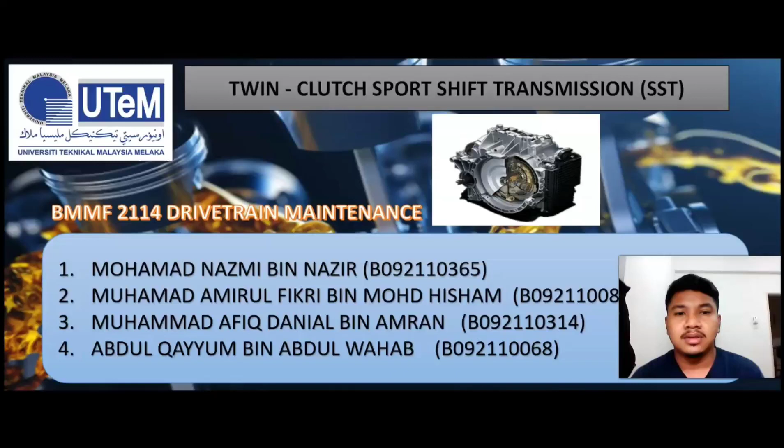I want to present about twin clutch sport shift transmission, SST. First one, introduction. Twin clutch SST, sport or Sportronic shift transmission, is the brand name of a 6-speed dual clutch automatic transmission with 2 clutches and a manual control mode, developed for Mitsubishi Motors. The system was first incorporated in the 2008 Lancer Evolution X and some models from the French PSA group.

It was designed to be a more performance-oriented system than that developed by rival manufacturers, with shorter gear ratios optimized for acceleration, which positively impacts vehicle dynamics and is important for high-performance cars. The twin-clutch SST performs shifts faster than a driver could in a pure manual transmission. It is also far faster than a torque converter automatic transmission or single-clutch automated manual transmission, both of which are found in some luxury and exotic sports cars.

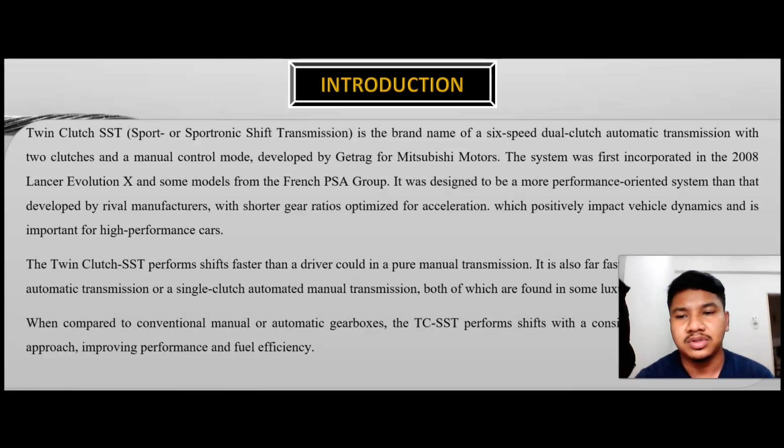When compared to a conventional manual or automatic gearbox, the TC-SST performs shifts with a consistency that no driver can approach, improving performance and fuel efficiency. Operation. The operation of TC-SST is smoother than that of a conventional automatic transmission because it uses clutches instead of a torque converter to transmit power. The key to the system operation is in the electronic and hydraulic controls.

TC-SST can select 2 gears at the same time by putting odd, first, third, fifth, and even, second, fourth, and sixth gears on separate input shafts, each connected to an individual clutch. While one gear is engaged by one of the 2 electro-hydraulically operated wet multi-plate clutches, the other is pre-selected, waiting to be engaged by the second wet multi-plate clutch. The TC-SST in principle behaves like 2 3-speed manual transmissions operating on the same output shaft.

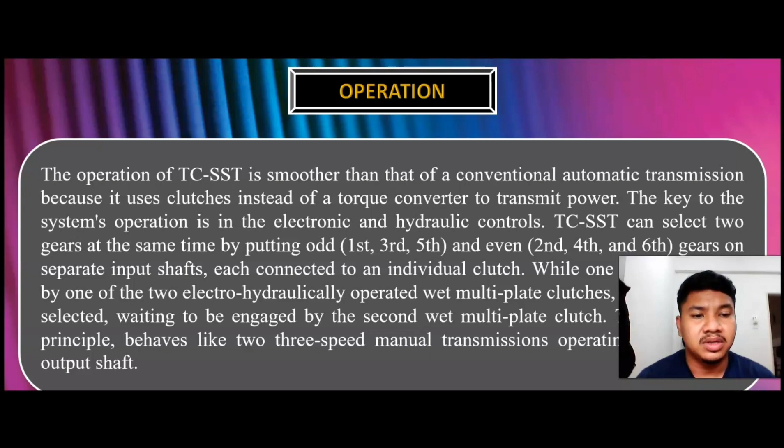I want to tell about how TC-SST works. Normal mode scheduling uses relatively low speed shift locations to deliver unobtrusive shifting for the best comfort and optimum fuel economy in everyday driving scenarios.

Sport mode scheduling, which is useful when driving in the mountains or when engine braking is required, utilizes higher shift points and faster shifting to give instant throttle response, instilling in the driver a closer man-machine relationship. Super sport mode scheduling, when compared to sport mode, keeps the engine turning at higher RPM while allowing for lightning fast shifting.

Shifting options. The TC-SST in the Lancer Ralliart has 2 drive modes, normal and sport, and within each, the driver can select automatic or manual shifting. The TC-SST operates in the same way whether the driver shifts manually or selects automatic mode. The console mount shifter, like a conventional automatic transmission, has 4 positions: P, R, N, and D.

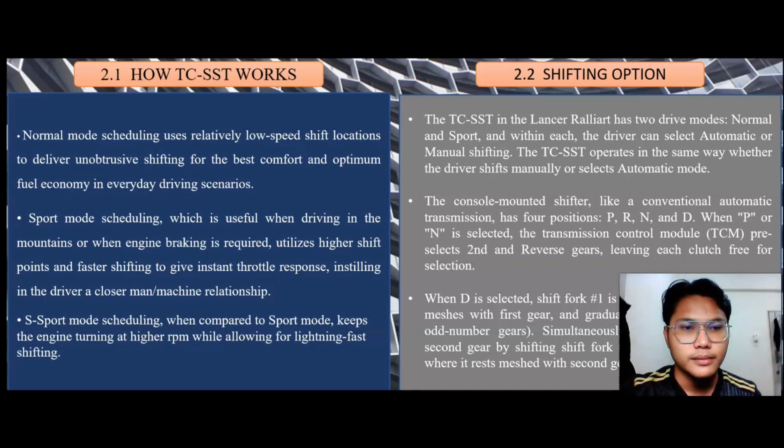Next, manual and automatic. With automatic or manual operation options, the TC-SST transmission makes a range for maximum performance and efficiency. Shifting is automatic if the driver leaves the shifter in D, and the driver controls shifting performance through two selectable drive modes, normal and sport. Normal is the default mode. In automatic mode, each drive mode controls shifting according to its own shift map and in response to numerous inputs from the engine, steering, wheel speed sensors, and the AWC computer.

On the console, the driving mode switch is positioned behind the shifter. Pushing it forward, or plus, switches to sport mode. At any time or vehicle speed, the driver can select between normal and sport mode. The driver can switch to manual mode at any time while in any drive mode using the paddle shifters.

Next is the manual operation. The driver can select manual operation in either of the TC-SST drive modes, normal or sport, and the drive mode selected affects shifting speed. The driver can select manual mode in two ways. The first one is with the console shifter, by pulling it back over D and then left into the manual slot, or the second one using the steering wheel. Pulling the shifter back, plus, selects an upshift, while moving it forward, negative, selects a downshift.

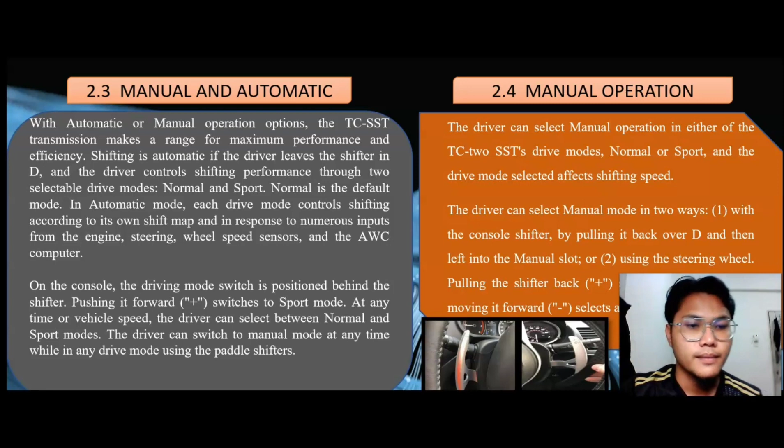So today I will explain about this transmission. When driving in D, the TC-SST gives a relatively close response. Just like the Lancer Evolution MR model, the TCM continuously accepts input from engine operating parameters, including engine speed and torque, as well as information from the AWC computer while in D, in either of the two driving modes. As a result, the driver may assume the TC-SST will select the appropriate gear for any particular cornering condition.

Then the second is the TC-SST, like a conventional automatic transmission, has a kick down function that selects a lower gear fast when the accelerator pedal is immediately pressed to the floor. Lower ratios will be held by shifting intelligently while the car is ascending and descending an incline, for example, for power or for engine braking. Pulling one of the paddle shifters will immediately switch the transmission into manual mode, allowing the driver even more control.

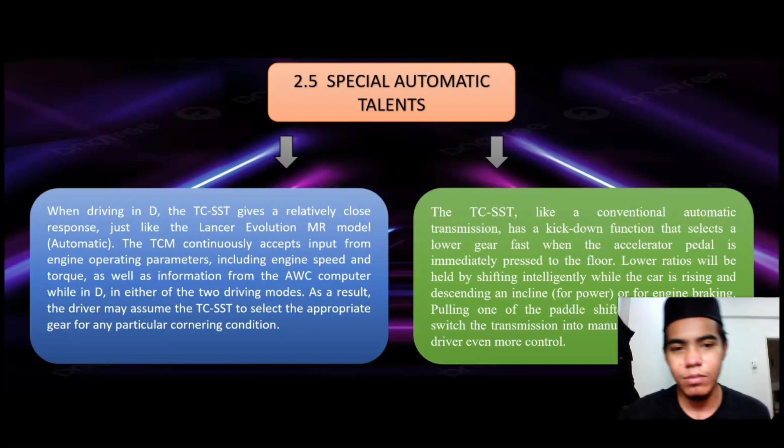The construction in SST is they have a transfer gear and then transmission control unit, sensor, transmission valve body, solenoid, oil cooler, and multi-plate clutch.

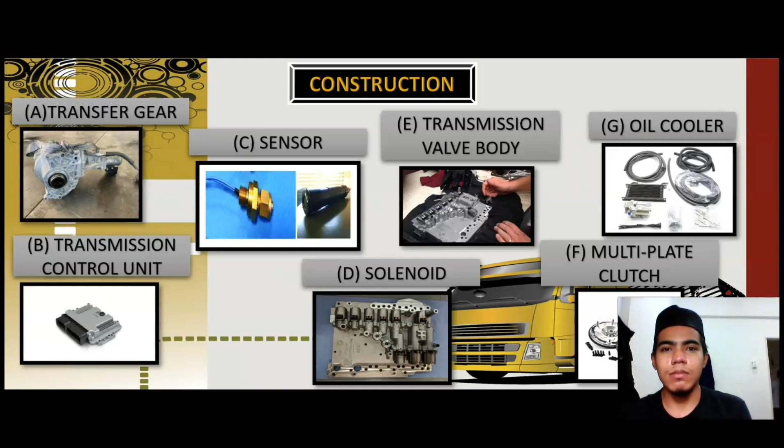The advantages and disadvantages. Firstly, the advantages: lighter and simpler than a traditional automatic. Sequential gear shifts are very fast and more efficient than a traditional automatic with a torque converter. The disadvantage is it is expensive, heavy, and more complex than a single clutch manual. Only sequential gear shifts are normally possible, and if they are not, then shifts in even steps, 2 gears up or down, are no faster than a single clutch transmission. Shifts are more abrupt than with a traditional automatic since there is no torque converter to smooth them out.

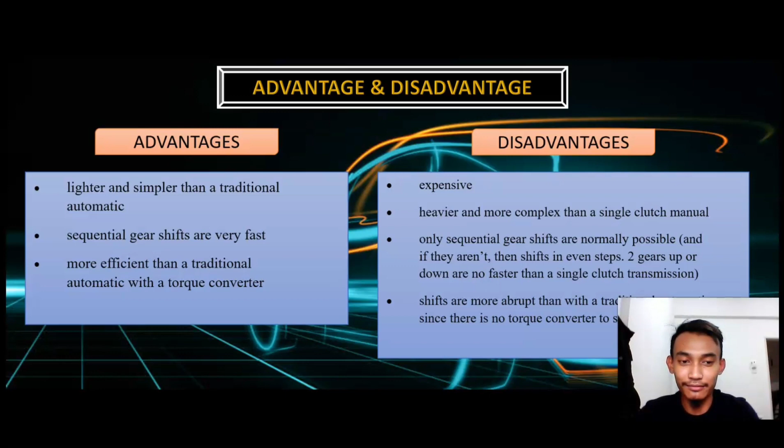In conclusion, a twin clutch sport shift transmission, also known as a dual clutch transmission or DCT, can offer a number of benefits for drivers who enjoy an engaging driving experience. These benefits include faster shift times, improved fuel efficiency, and the ability to manually control the shifting of gears. However, a twin clutch transmission can also be more expensive to repair or replace than a traditional automatic transmission, and may not be as intuitive or preferred by all drivers. It is ultimately up to the individual drivers to decide whether the benefits outweigh any potential drawbacks.